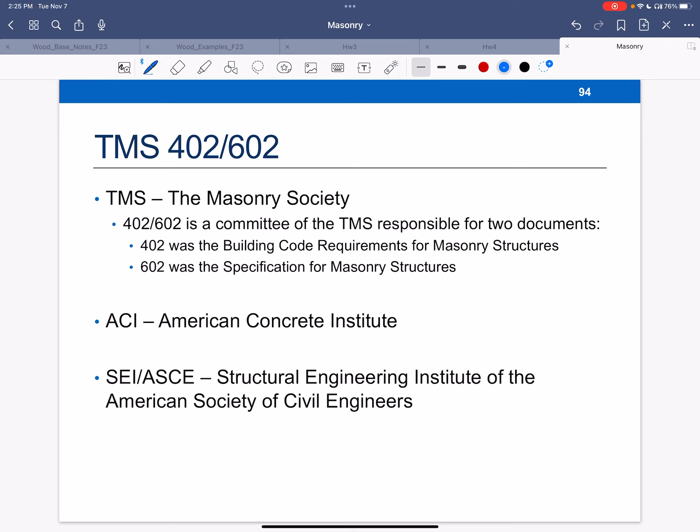Okay, so TMS is the Masonry Society. The committee is a joint committee that's responsible for both these documents. It's affiliated with the American Concrete Institute as well as ASCE and Structural Engineering Institute. So all of these work together. It's specified out of the IBC, International Building Code, just like 318 is.

All right, so the code side covers design and construction. One interesting thing here, it also includes glass unit masonry. You've seen that 60s glass block, it's still used, and that actually has coverage in the design code, veneers, and AAC, autoclaved aerated concrete masonry. So this is an autoclave process, high pressure and temperature, that makes a super lightweight block. And then the rest is typical structural items similar to what we did for wood.

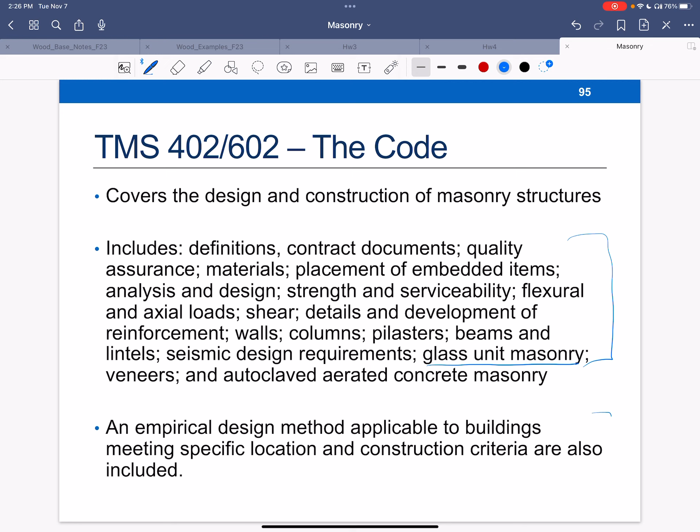There's an empirical design method for specific locations and criteria that they have. We'll talk about that a little bit. The specification part, the 602 part, covers the construction requirements. An example would be the QA, quality assurance for the materials. How do you place, bond, and anchor the masonry? And then how do you place the grout and the reinforcement?

So like I said, the equivalent in ACI is 301 and ACI 318. So for buildings, this is the code in concrete, and this is the construction spec. So that's what we had for reinforced concrete. And what we have for masonry is a similar layout, but it's 402 and 602, and they're put together.

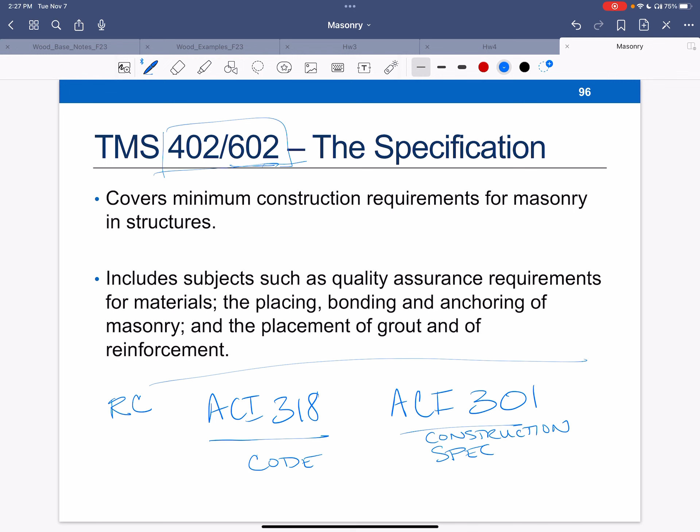This is available from the Masonry Institute of America. It's on your reference list in the syllabus. This is a handbook. It's essentially a really good textbook, or if you've had pre-stressed concrete, this is like the PCI handbook, right? Lots of examples and information about masonry. Very handy. It's the 8th edition of the handbook, talks about materials and properties, loads.

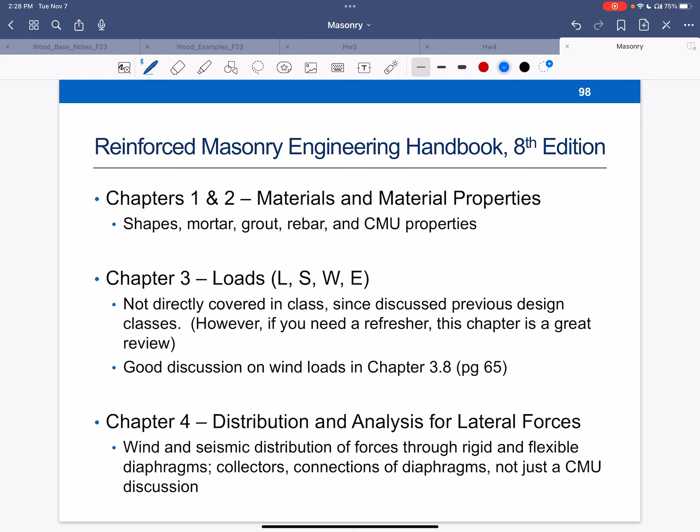We are not going to directly cover loads in class. We've done this in other classes. Lateral forces, this is also not just a masonry item. That's wind loads and things like that, covered in other classes. What we are interested in is allowable stress design of structural members. It's all the usual suspects: flexure, shear, compression, combinations of that, anchorage, bearing. Beams, columns, and the biggest usage for most of us will be walls. We are not covering strength design.

Sorry, that's my dog JJ, who's mad at me because it's dinner time for him.

Apologies. Details of reinforcement. We're not going to get into a ton of detail work in here. I want you to have a grip on the basics, how to use this code, and how to design the walls. Okay, so that's what we're going to focus on.

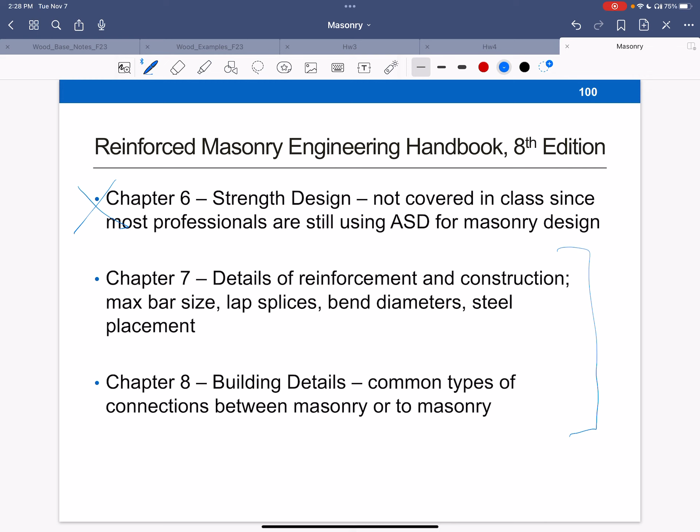No special topics. This is a bunch of formulas that are handy to have. So this is the difference between a handbook and a code. And you may have noticed in the PCI handbook. So when you're used to using something like ACI 318, right, it's the legal language on the left, and on the right is some commentary that talks about where it came from.

But general, like mechanics equations and other things like that, are not in the code, right? We don't have an example of how to design a beam in flexure in the code. We have the requirements, okay? And it says things like you're allowed to use the Whitney stress block, but it doesn't go through an example problem or even give you the formulas for a lot of those example problems. There are some formulas, the ones that are defined by code, okay?

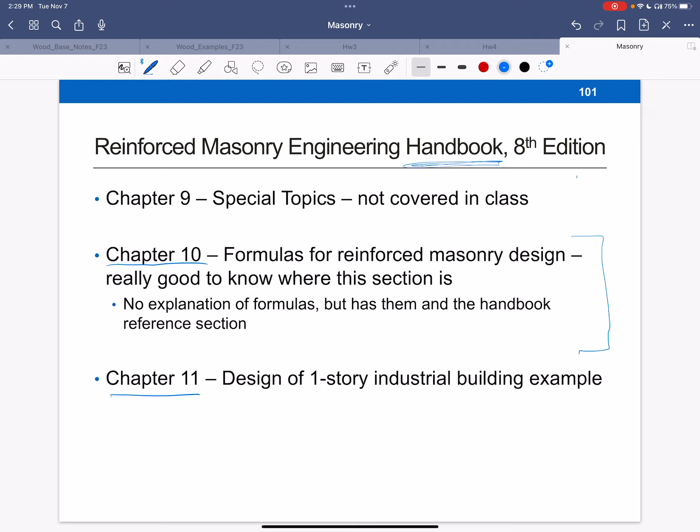So in a handbook, it's set up more like a textbook where you've got the things you need to know. And in this case, they've put all the formulas together in chapter 10, but it's handy as a reference. Okay. And then at the end of this handbook is a one-story industrial building example. So if you want to buy something to have in your books from this class, this is a good one because it's got the examples. If you go work for a firm, they may have this, but they will have the code for you.

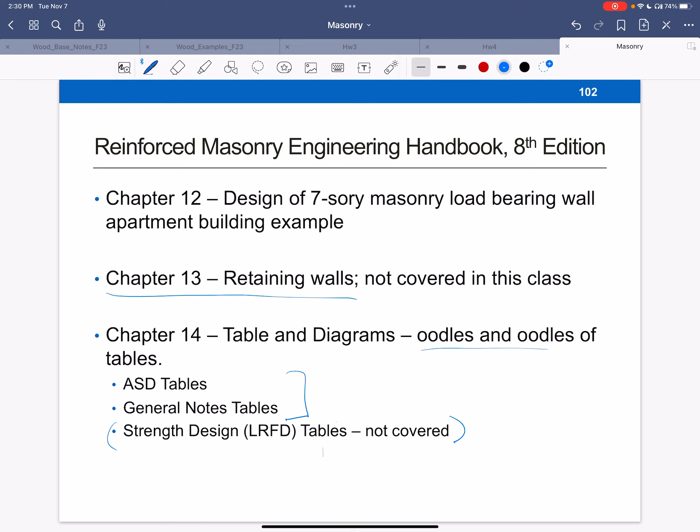Oops, sorry. All right. So chapter 12 is the next chapter in here. Another design example. We're not going to cover retaining walls, a common usage. This is more of a mixture between geotech and structures. And then in the last chapter, there's a ton of tables, or as Dr. Christian says, oodles and oodles. So we don't care about the strength design tables in this case, but we do care about some of these other tables that'll be helpful design aids. Okay. And of course, we'll go through examples so you can see where everything is.

I think this is a little more straightforward than the wood design. The wood design is not hard, but between the use of the two different books that we have in there, you kind of have to know where things are, more so than usual.

Okay, so before the 30s, it was basically unreinforced empirical. In other words, you design based on what we've always done before. After the California earthquake around that time, they realized that this just wasn't going to work in seismic regions, and you need steel in there to handle the tension as well as kind of the ductility requirements. UBC is what they used to call IBC/ICC. So this was the Uniform Building Code. It's now the International Building Code.

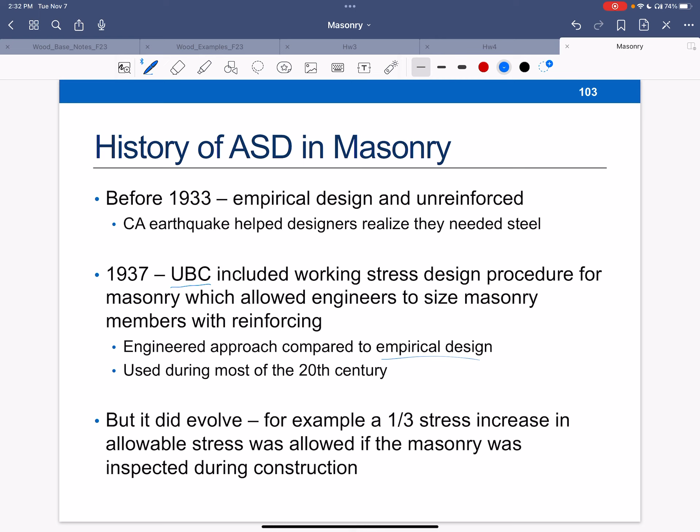So in the 30s, there was a working stress procedure for masonry so that they could size these members with reinforcing. It's an engineered approach rather than an empirical, kind of throw it together approach based on what's always worked. And this has been used through most of the 1900s. It evolved over time. At one point, if they could inspect the masonry, ensure there was good quality control, you got a third bump in allowable stress. Fairly recently, in the last decade or so, I believe, they changed this 1/3 stress. They got rid of that piece, but you got a higher allowable stress. And all the quality control pieces are now wrapped into the spec part.

All right, so regardless of the changes, it's got a lot of similarities to wood because it's using this allowable stress design. It assumes the traditional straight line elastic working stress. In other words, you're in the elastic region, so your stress strain curve is linear until it's gone. That makes things a little bit easier because I can go from stress to strain very quickly, among other things.

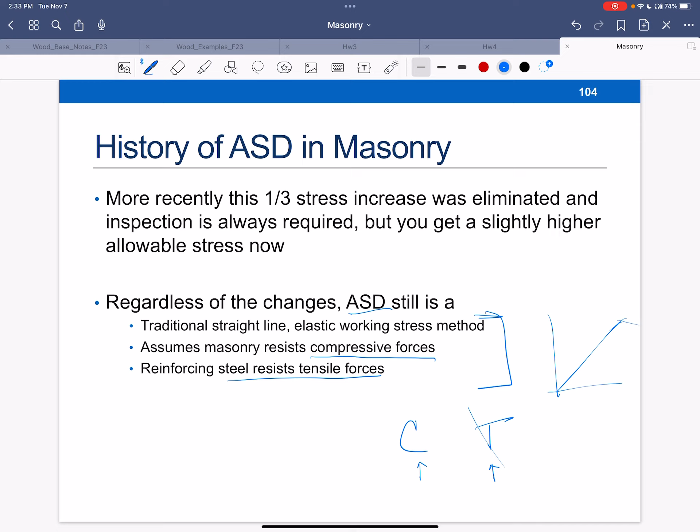It assumes that the masonry resists compression only. That's similar to concrete, and that the steel resists the tension, right? So the same thing we had with concrete: concrete for compression, steel for tension. So we've got big C and big T, and C is going to be the masonry, and the tension is going to be the steel. We're going to be designing with the reinforcement because there's not much to do with the unreinforced masonry. It just takes the dead load or the vertical load.

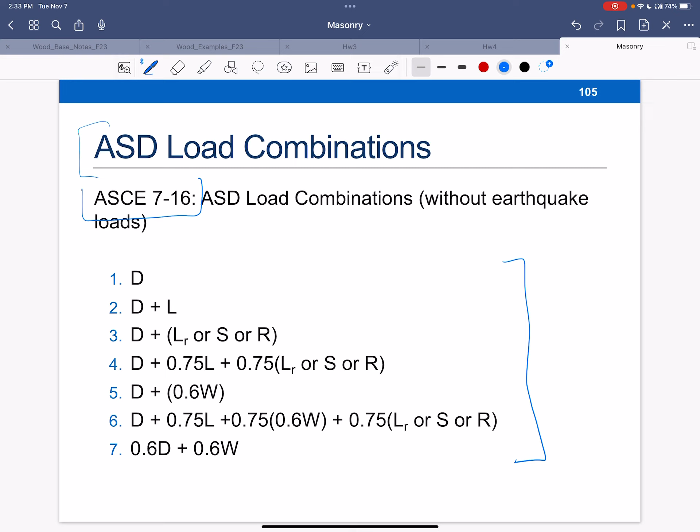Okay, load combinations. So you may want to mark this. No seismic loads in this particular group because we're not going to deal with that. These are the 7 load cases or load combinations that we'll be looking at. Should look pretty familiar because these are the same as wood. They're ASD, the same deal. Why is it the same? Because it comes from ASCE 7, the load book. Okay.

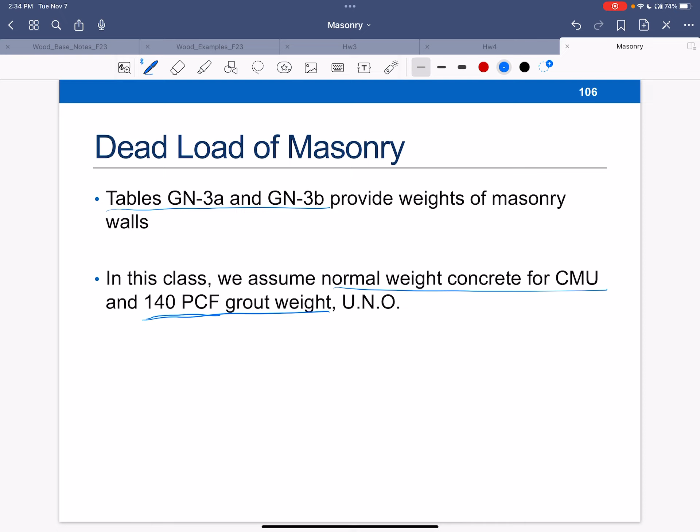For your dead load of masonry, there's tables that can provide that. We'll go through that when we do an example. What we're going to assume is 140 pounds per cubic foot. Okay, so normal weight concrete weight for the CMU, sorry, and for the grout weight. All right, so normal weight reinforced concrete is 150. Okay, and we'll go through this in an example too. Okay, I'm actually going to stop right here on the spec since it's a good kind of breaking spot before we get into the design.